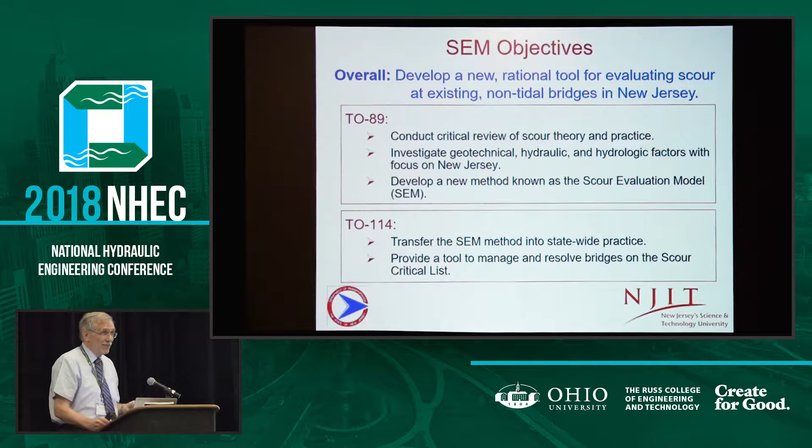Our goal was to develop a rational tool for evaluating scour at existing non-tidal bridges in New Jersey. We did this through a two-step grant process: the first task order was developmental, the second was implementation, and we did a beta test to bring it to the state of practice. Today I'll talk about the motivation and background, how the model works, how we input parameters, give a brief worked example, and update you on the implementation of the model.

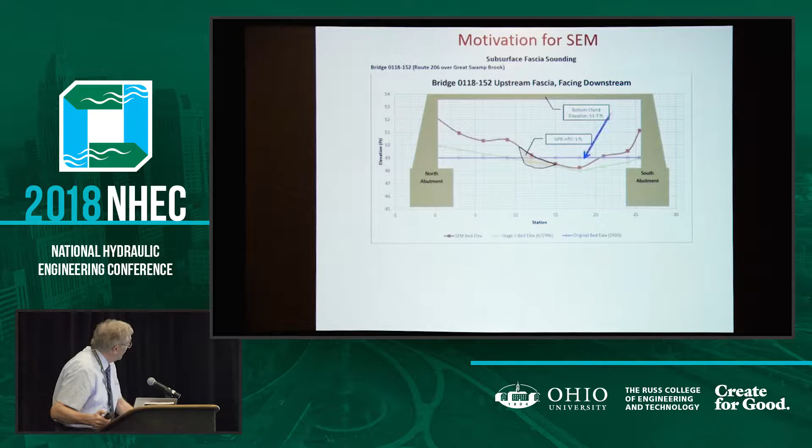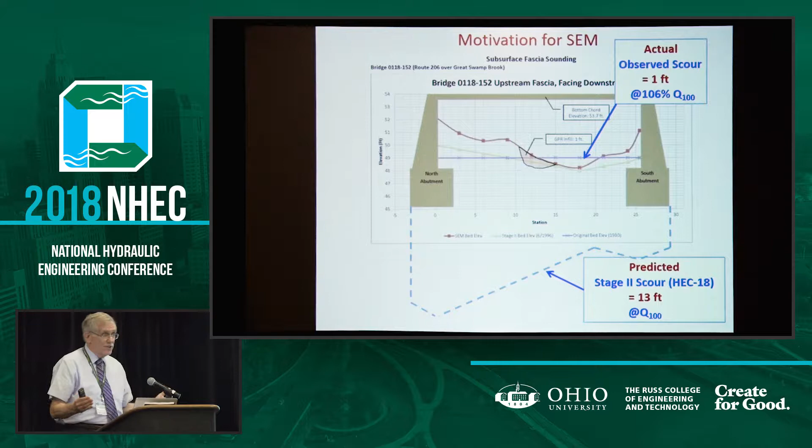Here's a familiar story, I expect - we've been talking about this. This is a bridge down in South Jersey, one of the many on the scour critical list. We did a very thorough study, noting where the stream bed was in the stage 2 studies about 15 years ago versus where it is currently. Taking into account infills, we found the actual observed scour at this structure was 1 foot, having seen 106% of the Q100 storm. This is what the stage 2 study predicted by applying the HEC-18 equations: 13 feet of scour. Clearly there's a disconnect - part of the motivation for our work and others as well.

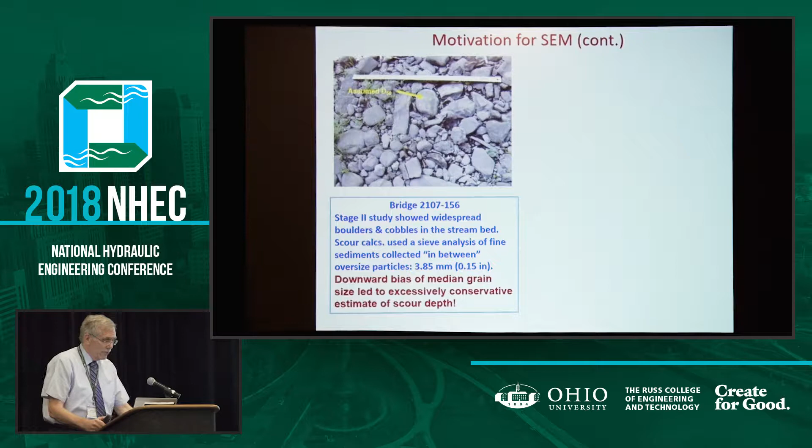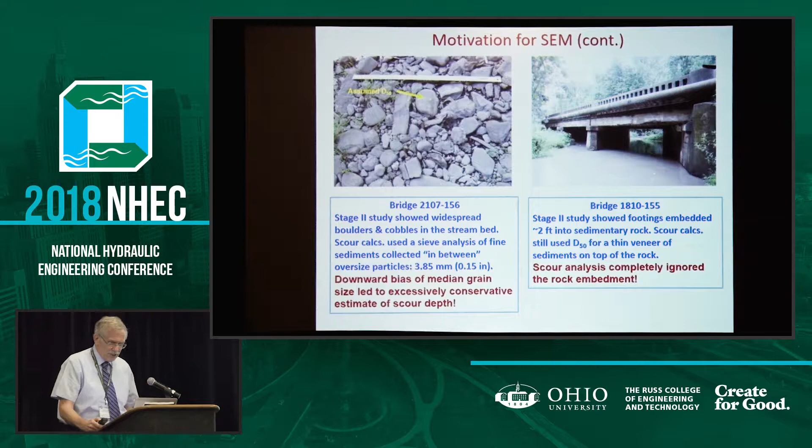Another similar kind of overestimation - this is a bridge where the stage 2 acknowledged that the spread foundations were embedded about 2 feet or more into rock, yet the actual analysis just focused on the veneer of sediments and the scour of those. So we learned two important things from these 3 bridges and the other 162 bridges in the stage 2s that we reviewed: number 1, that clearly better protocols for scour evaluation were needed, and number 2, a better decision-making process was essential. This was basically the genesis of the scour evaluation model.

We like to describe it as a holistic approach, similar to these days, of course, in the medical field. You would like to think your doctor is looking at you more holistically rather than just 1 or 2 parameters when you go to the office. That's really what this model intends to do - a thorough review of many aspects of the bridge.

So it ends up being a risk-based decision-making tool that provides standard protocols. Past performance and longevity are considered in accordance with FHWA guidance. We think it discerns more precisely those bridges that are scour critical from those that are not. It does prioritize the bridges and also provides specific recommended actions. Although the model right now reflects New Jersey's geology and hydrology, a lot of the model is generic and not dependent on the state of New Jersey, and is certainly adaptable to other regions of the country.

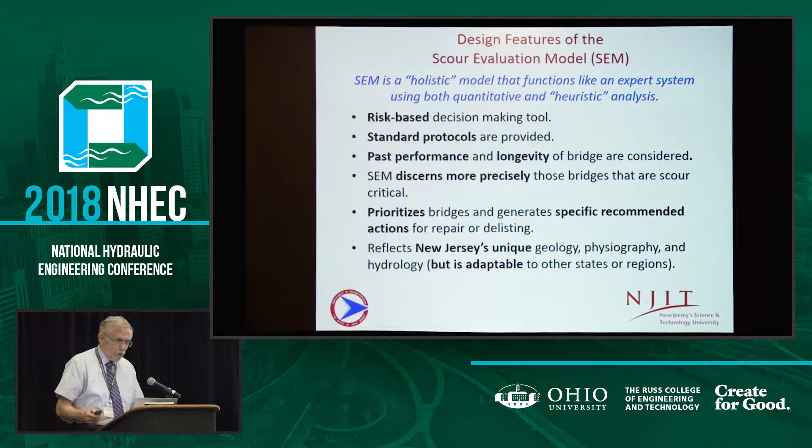There are 8 basic input parameters into the model: erosion classification of the stream bed - the nature of the geotechnical materials and how quickly they can erode; the age of the bridge; has the bridge seen substantial scour yet, yes or no; has the bridge yet seen the 100-year flow, yes or no; and does the channel appear to be stable. We also perform certain stability checks using either calculated or assessed conditions, which could include HEC-18 equations or the envelope curve method developed by Stephen Benedict down in South Carolina. We did a side study to confirm its applicability to some of our regions in Jersey.

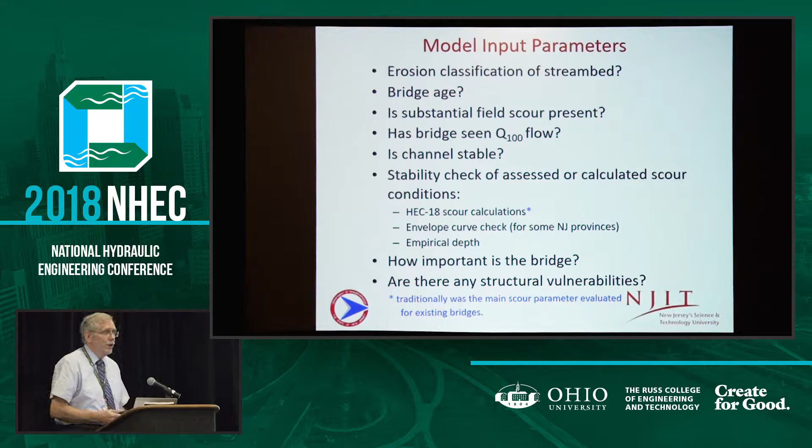Sometimes you have to just go with empirical methods when there's not a lot of good number crunching available. We also assess importance of the bridge and whether there are particular structural vulnerabilities.

A thorough field scour investigation will yield certain input queries to the model, things like the erosion classification of the stream bed, whether substantial field scour is present, and the age of the bridge, among other things. That is then input into the module, and it will yield whether that bridge is low risk geotechnically, medium risk, or high risk.

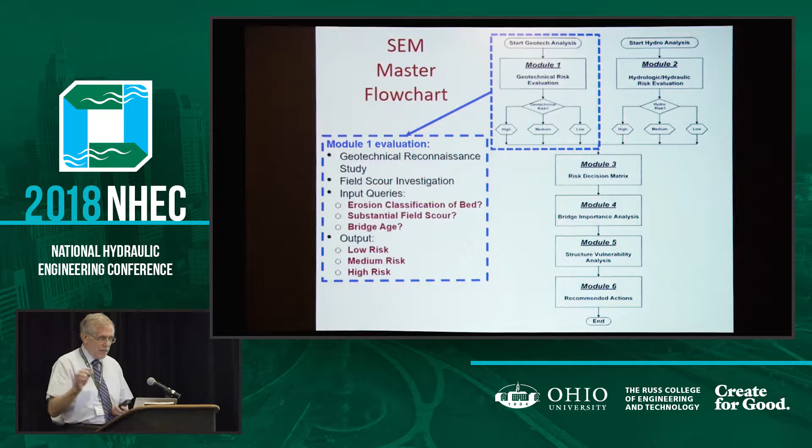Usually in parallel with this, module number 2 is the hydrologic hydraulic risk analysis, and really the heart of that is a 100-year storm check. We've chosen the 100-year storm as our risk dividing line, very similar to what the previous edition of HEC 18 used, and we still feel for existing non-tidal bridges it's a reasonable thing. Of course, that can be adjusted in any application.

Okay, the third module puts the results of the first 2 modules together. And we use for this what's called a risk decision matrix, something you've seen before throughout science literature and even in management, where basically we have 2 axes.

We have the geotechnical risk on one axis. We have hydrologic hydraulic risk on the other axis.

That leads you to one of 4 priorities. Obviously, if you have high geotechnical, high hydrologic risk, that is a priority 1 bridge. Priority 1 means fix it as soon as possible. On the other extreme of the priority levels, we have priority 4 bridges, which are low-risk bridges. Those are bridges that are candidates for removal from the scour critical list.

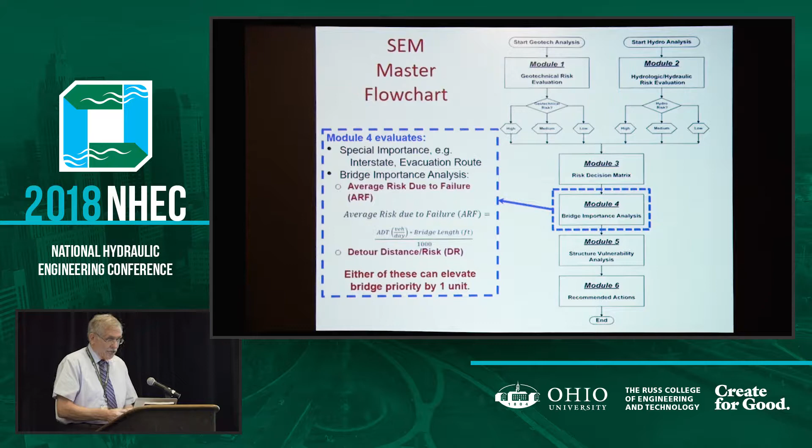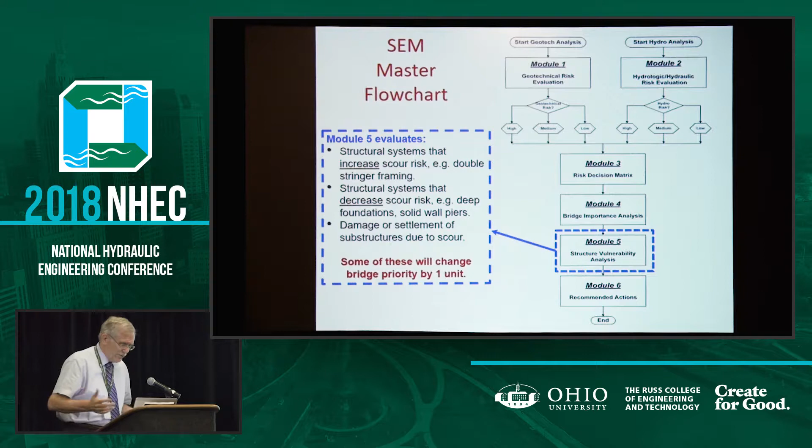In a similar manner, module number 5 does a kind of structural vulnerability check. We do get structural engineers involved, should be involved in most scour analysis anyway, but we're really looking for the obvious aspects of a bridge that might increase scour risk, such as a double stringer support system, or maybe individual columns on individual piers. These are things that, if there should be any compromise from scour, can really come down quickly.

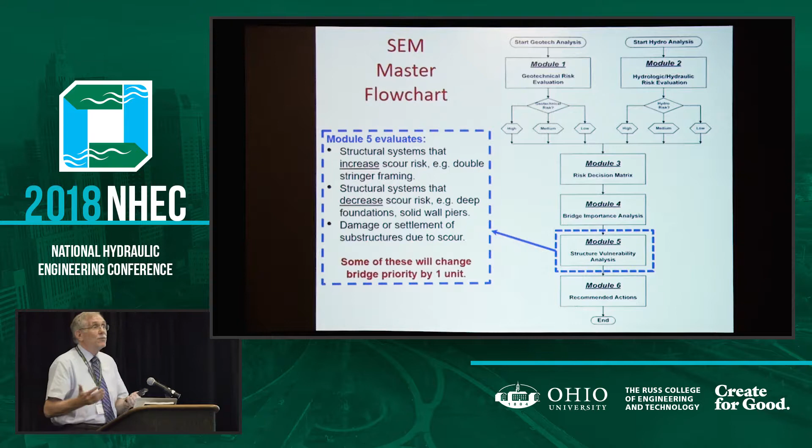On the other side of the coin, we have certain types of structure systems that decrease scour risk. Most obvious maybe being pile foundations. There can be other things, like solid wall piers. There are certain systems that you would actually prefer if the bridge begins to be compromised by scour.

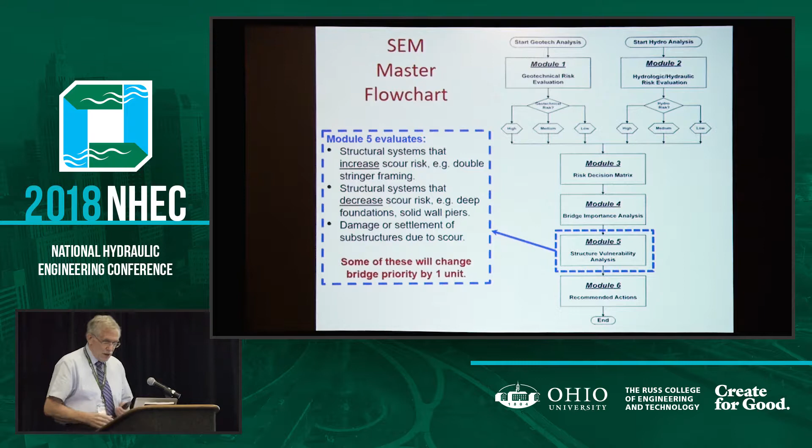Again, these may adjust the technical risk. They only will elevate it. These two other factors never will decrease it, but they may elevate it and make the bridge more important to fix as quickly as possible.

The last module basically puts it all together, and as we mentioned earlier, there's priority 1, 2, 3, and 4. For the priority ones, it's very definite what you will do. You'll fix it as soon as possible, continue the flood watch of that bridge until that's accomplished, and once it's fixed, you'll return it to the 2-year NBIS inspection.

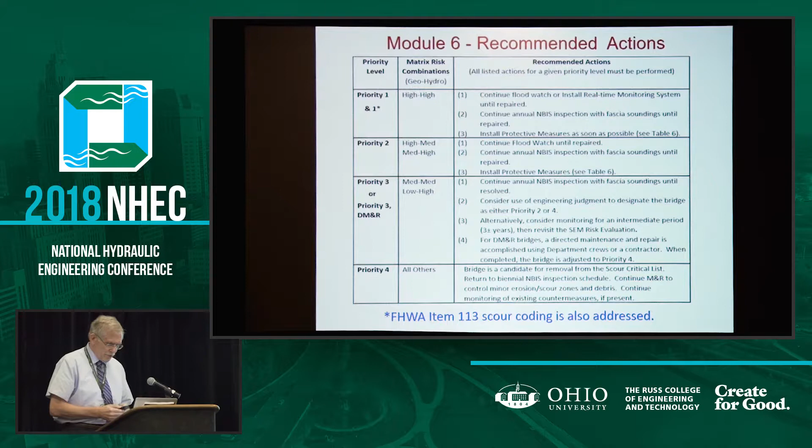Priority 4, the other extreme we mentioned, is a candidate for removal from the list. We also have priority 2 and 3, which have very definite actions that DOT will take, similar to what any other agency would do. So that's really the overview of the model.

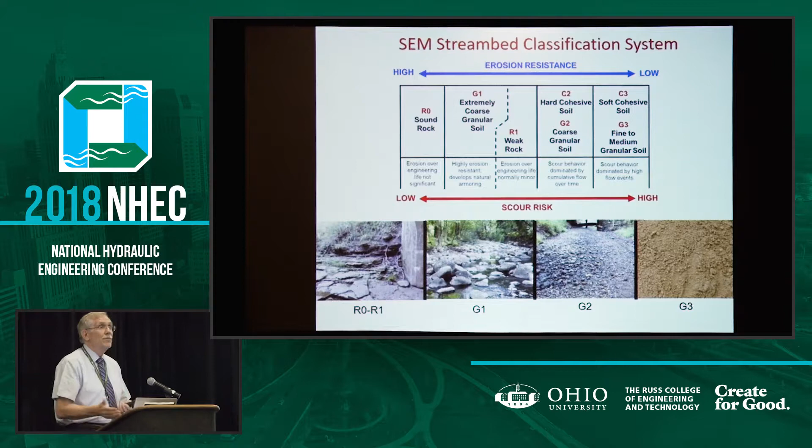Some of the improved protocols we've developed include this erosion or stream bed classification system. You're certainly familiar with the Unified Soil Classification System, which, including dual classifications, has 25 or more different soil types. But if you walk stream beds, within 50 feet you'll probably see at least 3 or 4 of those. So we've simplified and grouped the typical river sediments into 7 categories, ranging from sound rock, weak rock, extremely coarse particles, down to more classical granular and clay soils. These are examples of at least 4 of those 7 classification systems.

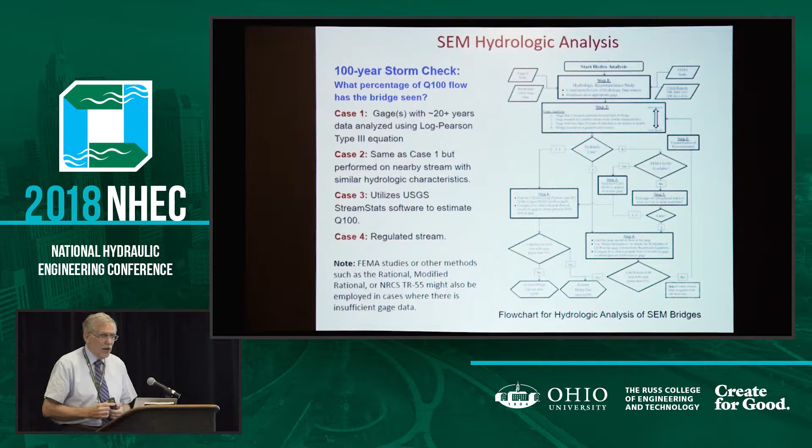We also give a lot of guidance on how to come up with the 100-year storm check. Sometimes that's not the easiest thing to do, so we have our technique for that as well. We basically have 4 different cases. The best case is one or more gauges on the stream with a lot of record, and then there are other cases. But we provide different options for coming up with that Q100 number for a particular bridge location.

We also have a standardized scour inspection form for field inspectors that prompts them to specifically look at many aspects of the bridge that aren't really contained on the NBIS form or other documents that states may use.

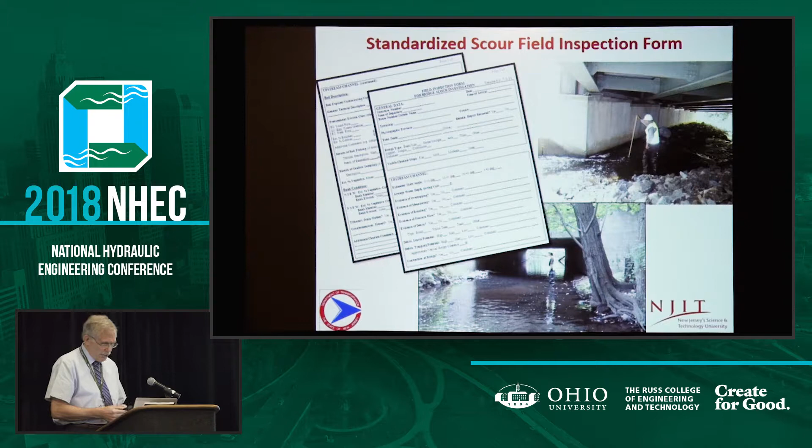Okay, let's go through a quick example. This happens to be a bridge with the real coarse particles you saw in the beginning. It was built around 1933, about 170 feet long, 3 spans, with concrete spread footings.

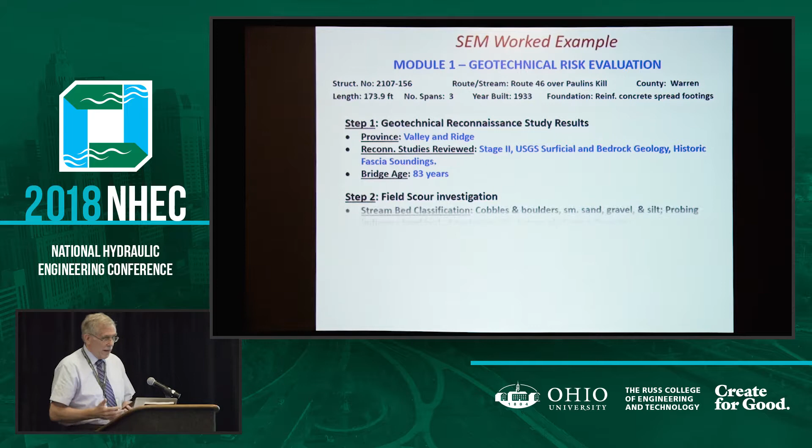So this is how the module plays out. This is usually explained in a 20 or 30-page report, but basically, as you can see, we thoroughly review every available piece of information for the bridge, including the history of fascia soundings that are available.

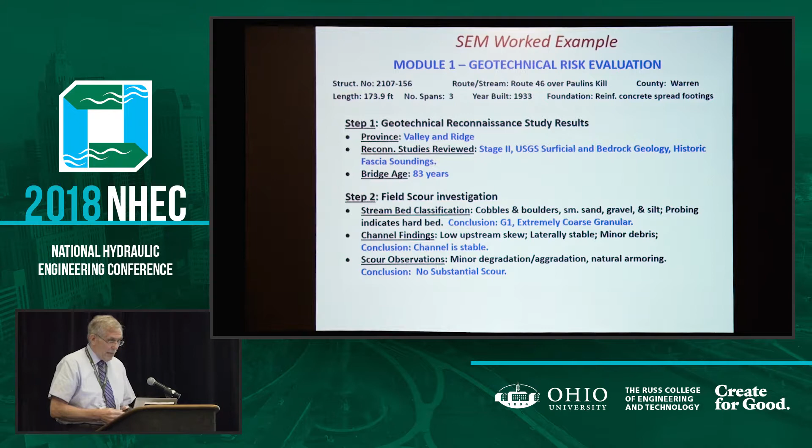We then do the field scour investigation, which verifies the stream bed classification. This particular one was a G1, meaning mostly cobbles and boulders, a very coarse bed. Checking the channel findings, it was laterally stable, with scour observations showing just some minor degradation and aggradation.

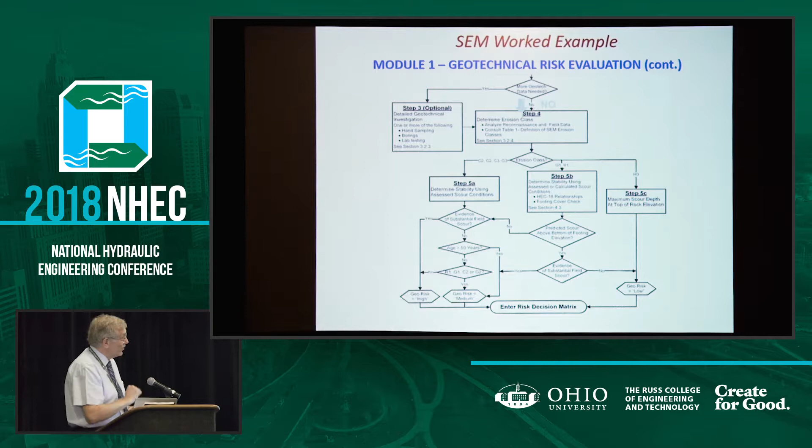Continuing on, this is what the flowchart for the geotechnical risk analysis looks like. I won't speak too much about it to allow time, but working through this, in this particular case it was a G1, which prompts a scour stability check. Two HEC 18 equations were used, the NCHRP 24-20 and the coarse particle equation. Both came out okay for that bridge.

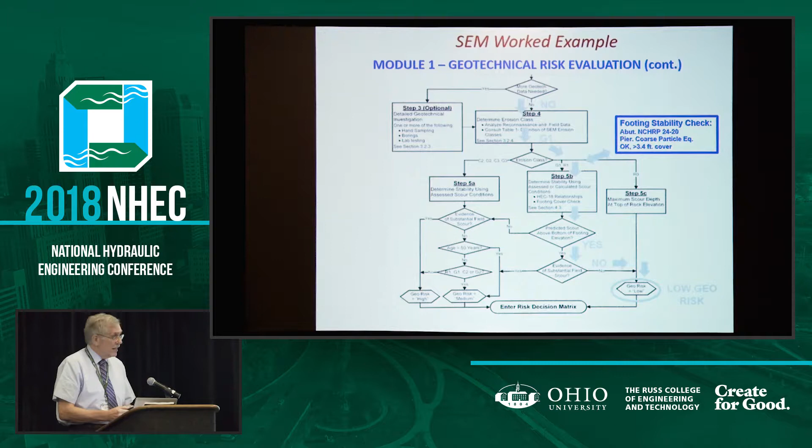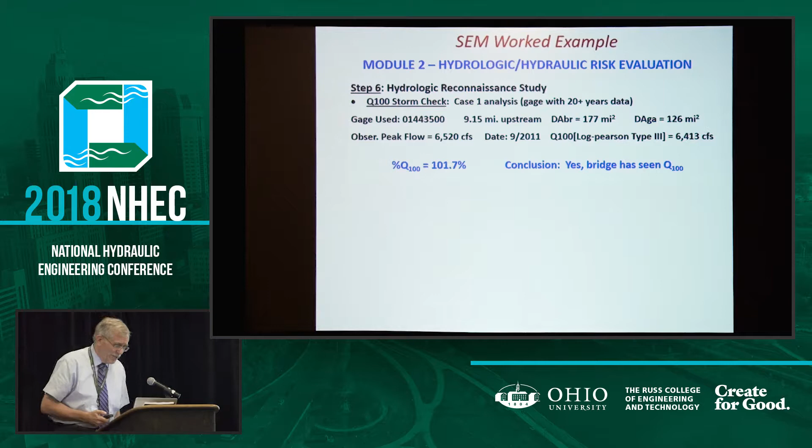Continuing on, has the bridge seen substantial scour? The answer was no, which ultimately leads to a geotechnical risk of low. Let's take a quick look at the hydrologic module. The heart of that is the 100-year storm check, which was checked for this bridge. It had seen 101% of the 100-year storm, so the conclusion was yes, it had seen the storm.

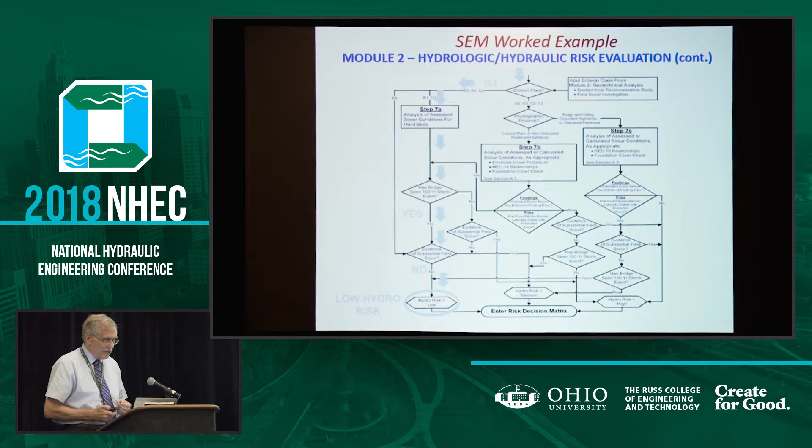We then go into the hydraulic flow chart in a similar manner, using input factors such as the erosion class, the finding of the 100-year storm, and whether substantial scour is present. The conclusion was this was a low hydrologic and hydraulic risk.

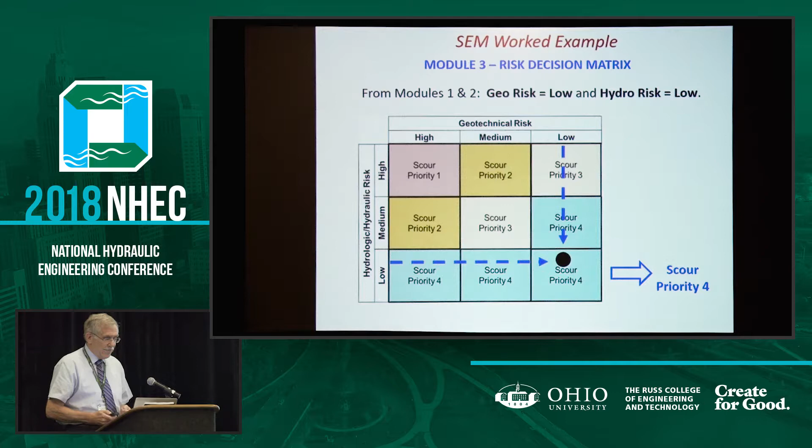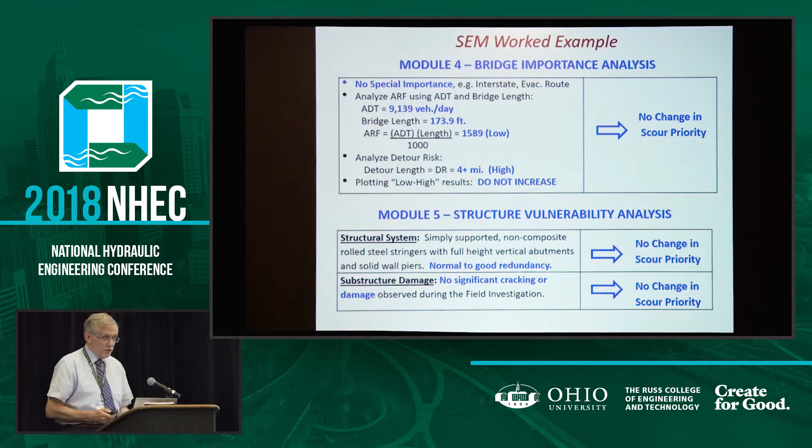Put it all together into the risk decision matrix: low and low leads us to a scour priority 4. A final check of the adjustment: this bridge had no special importance within the inventory, and was found to have no major structural vulnerabilities, so no change in scour priority. The final conclusion was this is a priority 4 bridge. We also provide guidance on how to code the bridge using item 113.

So let's get to the bottom line here. About 2 years ago, we embarked on an implementation phase to bring the model to practice. We went out and did 19 scour critical bridges, with 3 participating consulting firms. B. Hunt and Brian Shields were part of that team, and they were the leads on their projects.

We stress tested this model over the entire state, starting from the northern tip where the Appalachian Mountains and hard beds are predominant, all the way down to the south where we have unconsolidated coastal plain sediments, and everything in between. New Jersey is a very small state, but geologically very complex. We have it all, and it's actually very easy to teach geology courses here as a professor, because you just have to drive an hour in each direction to find every possible condition you could imagine.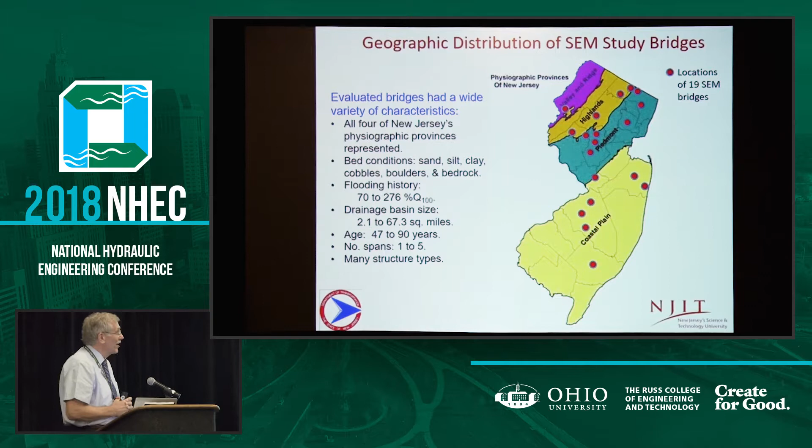Out of the 19 bridges, we found actually 5 of them were priority 1. They were immediately put to the project management people at NJDOT for immediate action for design and repair. We had 2 priority 2s, a little more of a delay in response to those, and we actually had 10 bridges priority 4, which basically means those 10 bridges, examining other aspects, there might be reasons other than scour that those bridges are going to be replaced or repaired, but 10 of them from a scour perspective were deemed adequate.

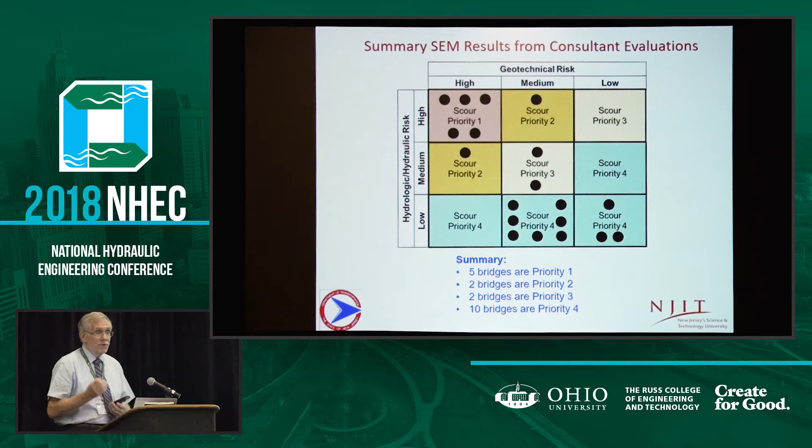We often are asked, some final notes, how did we develop this model? We consider it an expert system, and you may know that an expert system is really a very narrowly focused problem-solving tool, say in the field of AI, artificial intelligence. Our objective was to try to mimic the kinds of judgments and analysis that an experienced scour engineer would undertake.

The data techniques used, just FYI, usually forward chaining, that is starting out with facts, going through a decision process, and coming to a conclusion. That's how expert systems like SEM function, but how are they developed? They're developed by backward chaining. And that's how we did it, where we start out with conclusions. We know this bridge is good and this bridge is not good. We wanted to make sure that the input parameters and the decision process were leading to the correct solutions.

Having said this, you can see that although it was developed in the state of New Jersey, most of the model is generic because it's related to the erosion classification of the materials. So really it is adaptable given the diverse geology of New Jersey. It is fairly adaptable to other states and regions, and certainly if anyone would like to have a conversation with us or to review our documents.